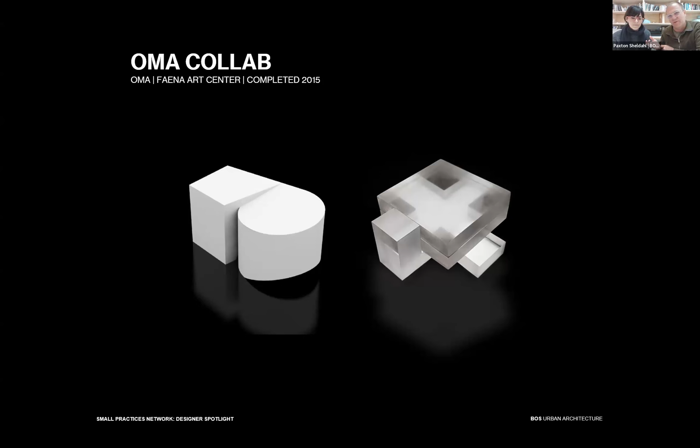We initially started the office through the continuity of, like I mentioned before, completing the Faena Forum. And then we assisted in the design, development, and construction of the Albright Knox Museum in Buffalo. I thought we'd talk a little bit about those two projects, just to run through some of the thinking behind them. I think it's kind of fun to see how they were developed.

So we thought we'd share this collaborative work, and the presentation is going to oscillate between these very large scale collaborations and very small scale local work.

This kind of box of chocolate model representing massing strategies was pretty integral to both the programmatic and the massing and formal resolution of the project. So in consideration of the context, program, site, and scale, we developed a figure ground diagram that related to many different contexts.

Also informing the massing was a consideration of the district itself and how they had all worked together across Collins Avenue, even though it was quite busy. We wanted some formal relationship between the two.

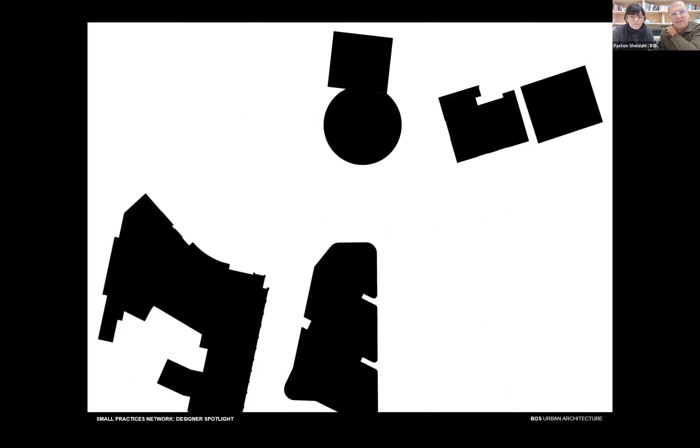So here's our final figure ground that translated into the massing. A secondary consideration, no surprise for those that know OMA's work, is the program, which was central to developing the massing.

So in the end, those two cubes in a box of chocolate model end up being a cylinder and a cube. The cube ended up being one venue, the cylinder another, but when they came together, it became a singular larger venue on the one floor where they intersected.

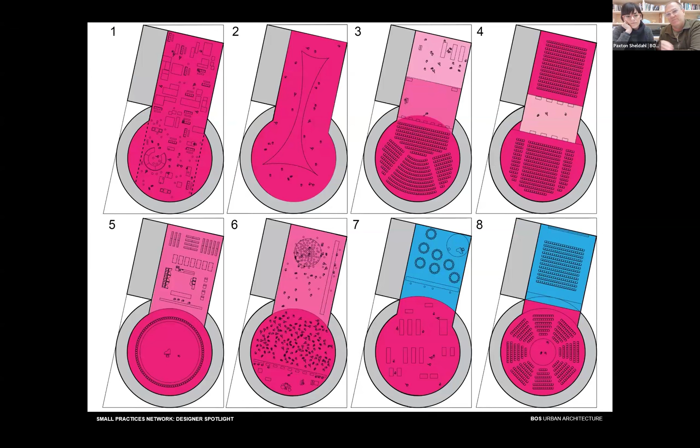This helped the pragmatic programmatic idea of how the client needed to hold simultaneous events sometimes, and singular events at other times.

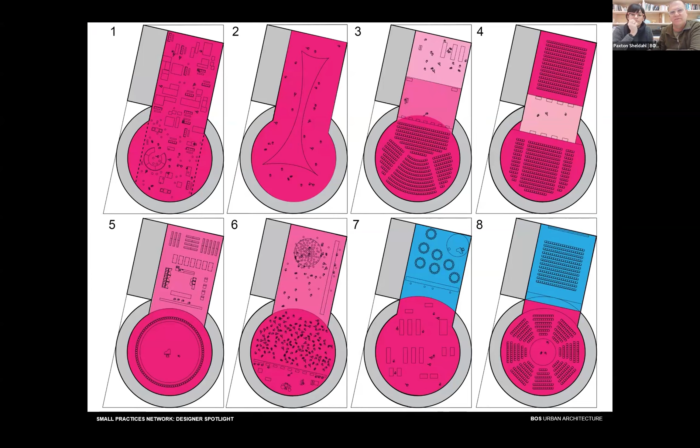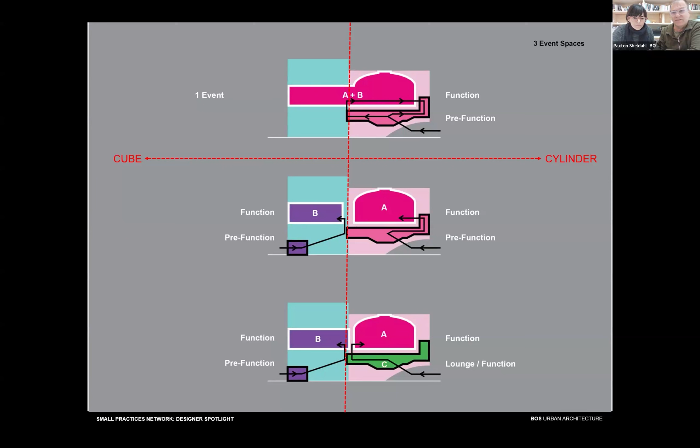These two volumes have specific plan identity that can be separated or brought together depending on event size. We did a diagram showing in section: A plus B on top is a singular event; A plus B, A and B in the middle is two different events with different pre-functions; and A, B, and C is where we actually use the pre-function for a third space. There's also a D underneath the cantilever, which I'll show later. So there's three simultaneous events.

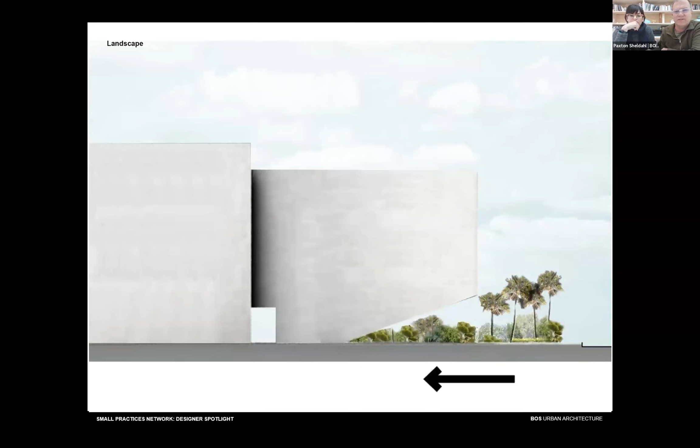But by removing that, it created our own structural issues, so now the cube itself is holding the cylinder up on one side, which basically lent itself to joining and merging the two volumes on one side versus having autonomy on the other.

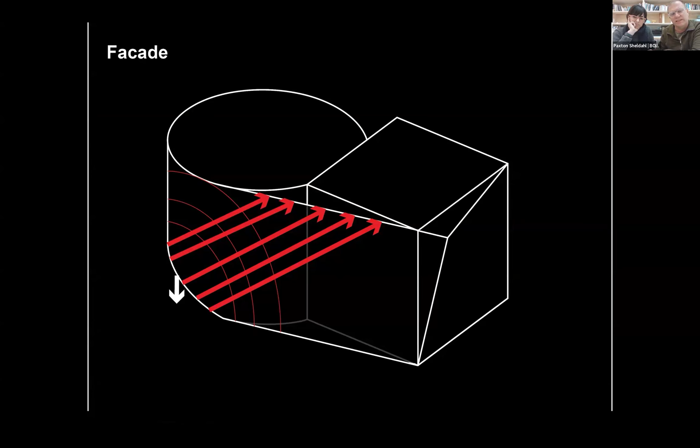So if you come from the north, it looks like a singular building. Come from the south, it looks like two buildings.

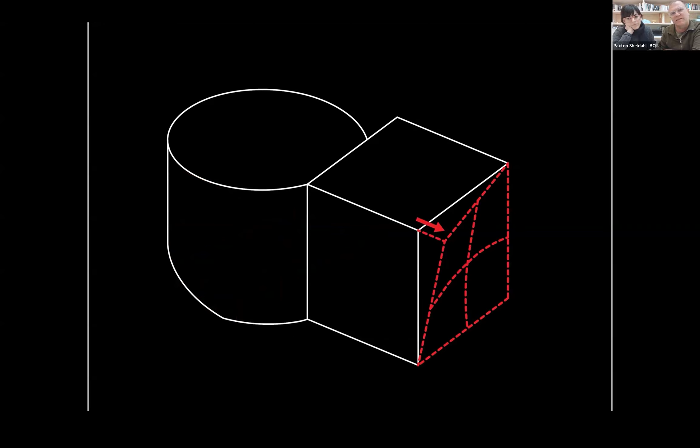In addition, even though we lost some area on the front, we gained some on the back. We were able to cantilever over the Indian Creek, set back up to 20 feet on the 4th and 5th floor, which gave us this ruled surface on the backside to gain a bit more space.

Here's our ultimate massing diagram: a singular building coming from the north and two buildings from the south. It maintains the scale of that box of chocolates, where the site almost feels like two buildings coming from one direction and one from another.

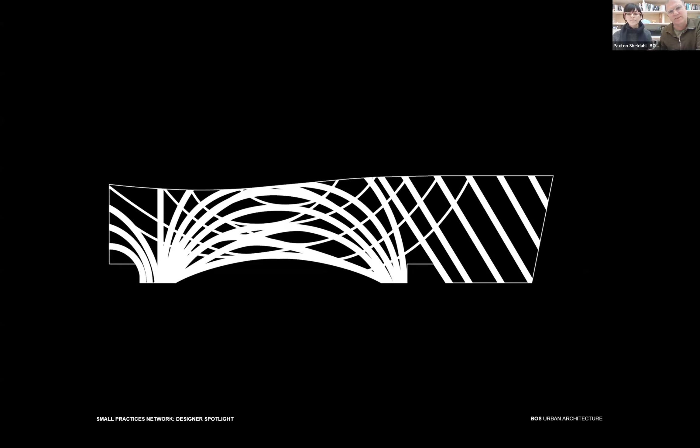This is some diagrams of how we developed the facade, an unrolled elevation of both the cylinder and the cube, with a series of catenaries and arches to support that cantilever, overlaid with essentially a grid that was an already approved NOA window system.

NOA is like the hurricane approval system in Miami Beach. If it already has an NOA, you save a lot of money because you can use an older testing strategy. So the overlay of those two basically became the facade.

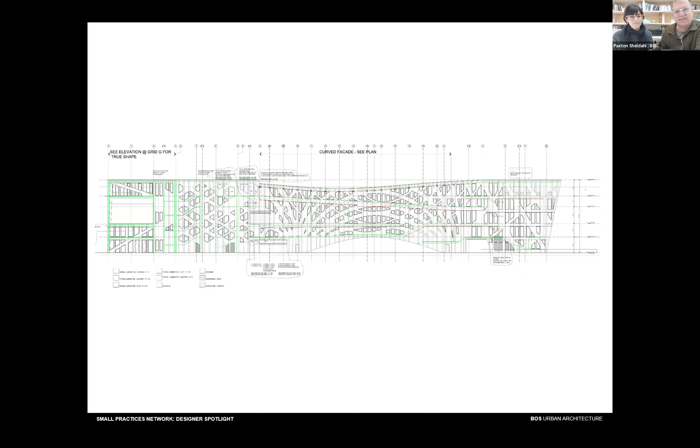Of course, it's a little more complicated than just those two things. There are floors, and everything seen here in green is essentially vertical circulation—ramping, floors. So there's a lot of coordination between inside and outside in terms of how the facade interacts with the interior. I have a few photos showing it's mainly a cast-in-place structure, and this is the ramp coming around the dome you see beyond.

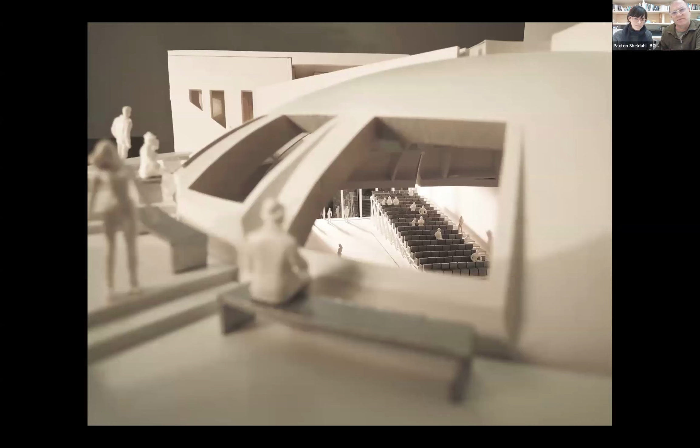A couple different slides of that, and the relationship to the facade is also integrated into that relationship. Here are some of the models of the ramp coming around the dome and looking through the dome that we used to test this idea.

And then here's the actual construction, which was not very straightforward. Originally it was supposed to be a cast in place dome with a roof terrace and a lot of other functions that had to be abandoned because of the time it took for the concrete to cure.

And the delays in constructing the rest of the building meant we had to rethink the dome into a light gauge metal structure, which was interesting because there's a company called Radius Track that does CNC bending, so you could actually make complex shapes with a high level of accuracy like you see here.

But ultimately it was a blessing in disguise, because of how much infrastructure needed to be added to the dome between the lighting rails, the strong points, the audio, the speakers - all that integration would have been very difficult in a cast in place structure. So I think in the end it looked exactly the same, still the same kind of massive look, but it's essentially a hollow freestanding structure.

Here's just some of the images of that ramp going behind the dome, looking through the dome. And I just have a few images to show the programmatic separation between the spaces.

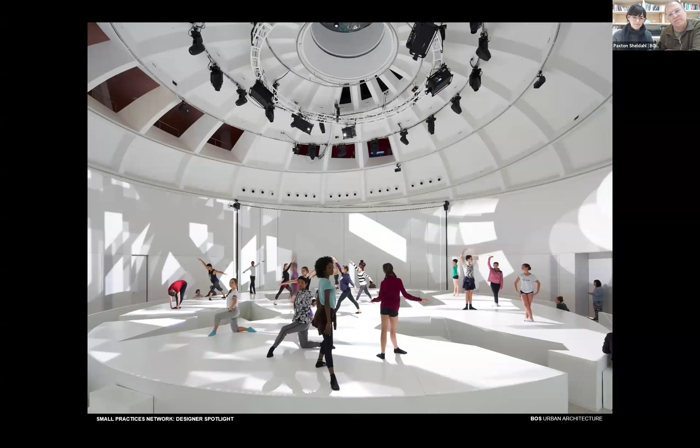So these are these large doors that could manually slide to basically close out the space. One of the first exhibits or shows was by Pam Tanowitz, a choreographer who did a dance recital inside the dome, and we designed this platform to fit into the space for that kind of performance.

And here's just an image of the opening. You can see the 3 different buildings - the 3 boxes of chocolate, the parking structure, which we're not really talking about today, and the historic renovation - those are the 2 you see in the distance, and then the final forum is in the foreground.

So this was like the beginning of our company, where I was going to Miami a lot, spending a lot of time, and we reflected on maybe some things we should have done and didn't - like developing and testing our own business strategies while we had stable fees through our collaborations. That would be some advice for those collaborating and having some stability: take advantage of that time a little more than maybe we did.

At the moment, we're still kind of trying to do it, working on it, yeah, yeah, we're working on it.

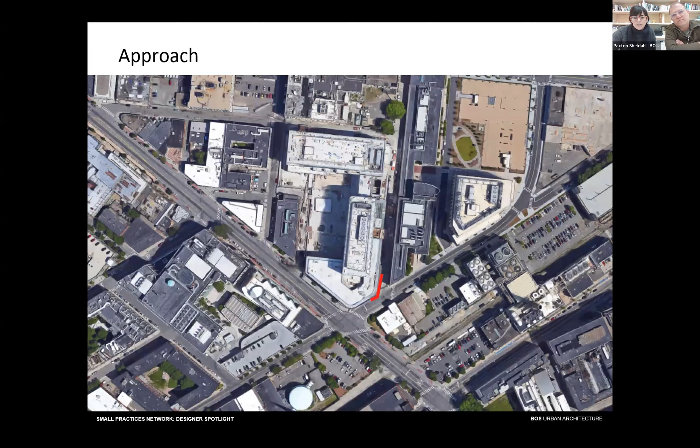To stitch the experience and address the issues of privacy and light that comes with having a 16-foot tall curving glass facade, we decided to create this system of wood fins that would unify the back and front, as well as create a cohesive language on the facade.

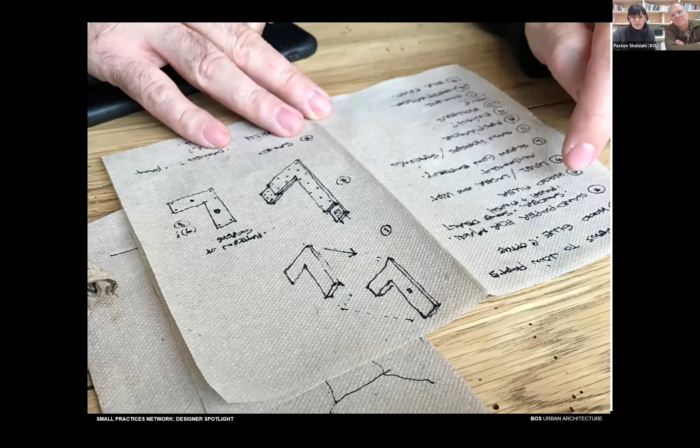As you can imagine, budgets were small and modest. During the pricing exercise, we tried to figure out ways of building these things. We went through several iterations. In the end, we proposed to the client that we were going to build it ourselves in collaboration with Bill Bancroft, which I'm sure a lot of you know. I know Penn knows Bill. He let us use his space, and it was instrumental in us being able to pull this off.

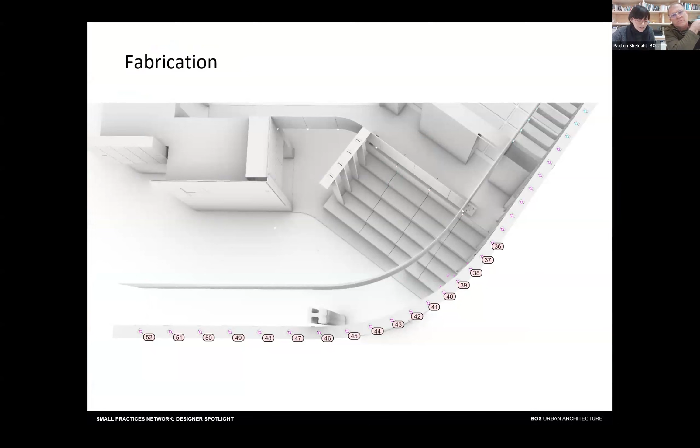There was a process that comes with building your own millwork, so we developed that along the way. We also collaborated with the GC that was building the vanilla box, and as we were developing the fabrication model and schedule, we started fabrication, the site started construction, and we started delivering.

We were milling and delivering parts day and night. This is actually before New Year's. There was a lot of labeling of parts. This is almost like building a model in studio, but big. The fins were super big, ranging from 3 feet to 16 feet.

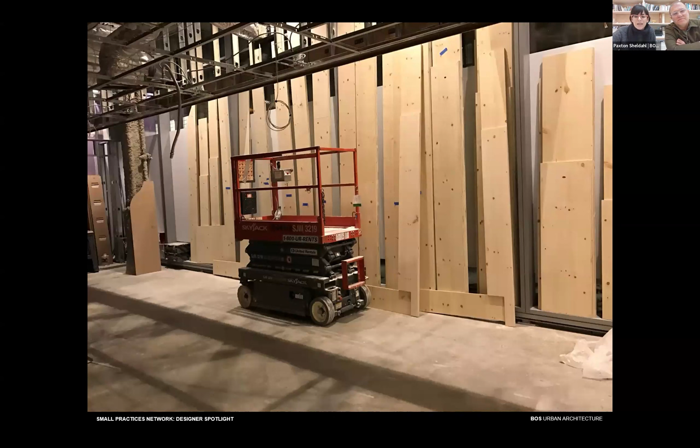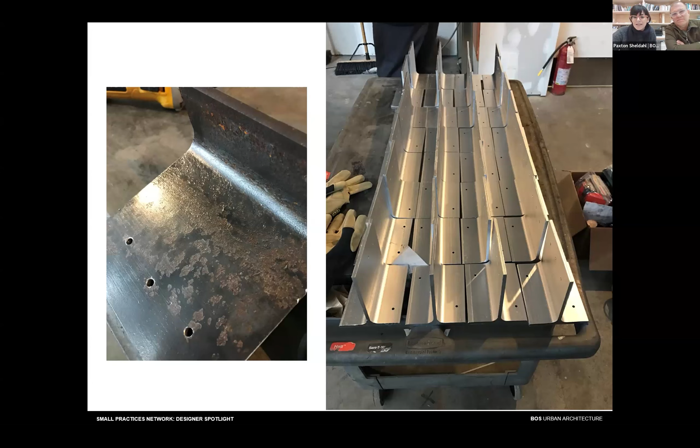We rented this little lift, and we had to coordinate it very carefully not to be in the way of the contractor. We were involved in all moments of the construction of this millwork, from creating the pieces that held the fins up—we punched the holes, then cleaned them, painted them, etc. Very dedicated. Here's some photos of that process.

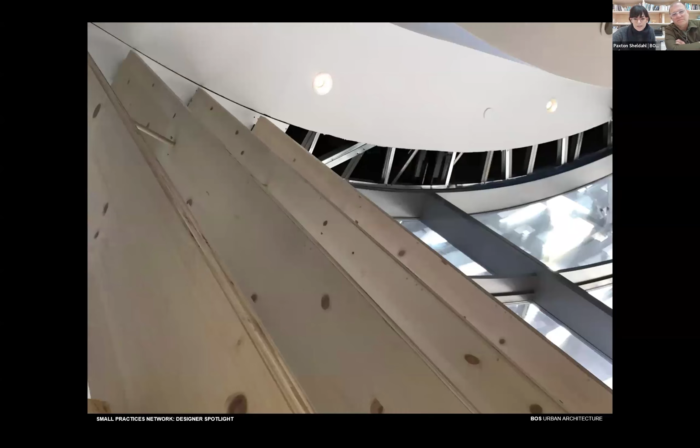We actually had to reinforce some of the structure to support the weight of the fins. That was fun. But it was actually extremely robust when it all came together.

At some point we had to intersect with the work of the contractor, and that was nerve-wracking, but it worked out. They framed the steps, and we were coming down with these fins, and it really is a perfect match. So we were very happy.

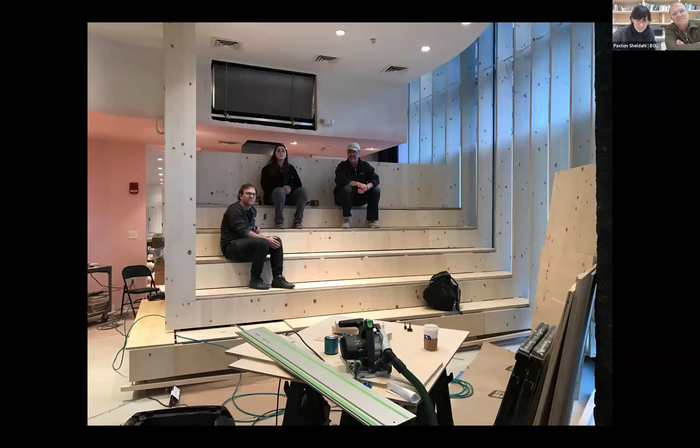Then the finished work came in, finished, sanded everything. Here's our crew, Bill there, Emma. And this is kind of like the final products and images that we were very lucky to have Bruce Lamonte photograph. So that was nice.

The studio creates a beautiful glow at night, and it feels really pleasant. Here's some final photos of the space.

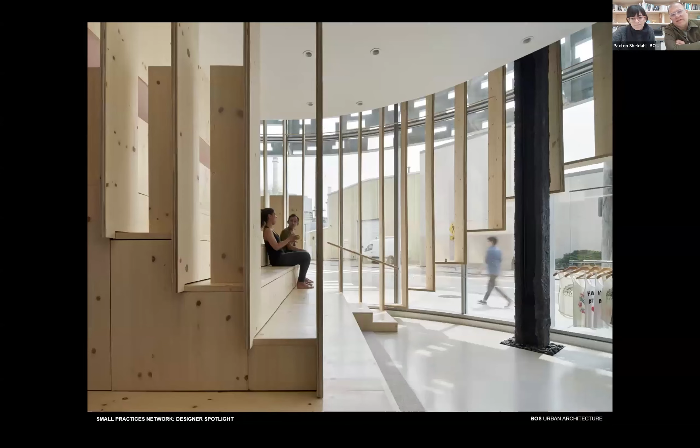Since the pandemic, it has been closed, but we have some good news: we just got called by some fitness studio that's renting it. They're in negotiation with Novartis to rent it, and they called us to help them retrofit it to whatever their needs are, but hopefully it doesn't change too much.

The lessons learned here was to get that last payment by building it into the retainer—we're just going to leave it at that. It's called the 30% rule. They're always going to try that 30% rule, stiff you for 30% if they can. No, maybe, okay, maybe not. Maybe not, but maybe yes.

So we're going to move on to another project. This is a typical office renovation project. This time we were extremely lucky to work with PRX. PRX, as you know, does podcasts, but they also have a podcast garage, which is a place for community to learn about creating podcasts.

So we helped them move into their new offices. For that, it was again a very constricted space, light on one side. So we used models to mock up the different concepts for the office space. On one hand, they needed an open office for collaboration, for workshops and things like that. On the other hand, they needed privacy—a place to make phone calls, etc. That was very challenging.

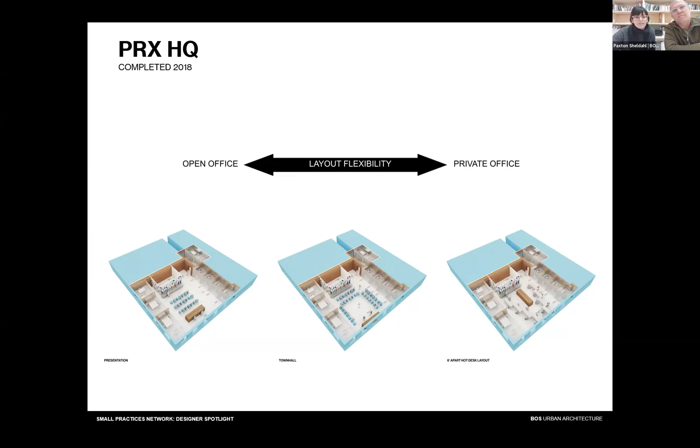In general, we basically filled in all of the edges, allowing light in—the one wall that brought the light in, we opened up, as well as we have light coming from the south. So how do we marry those two conditions where we need privacy, but at the same time we want to let light in?

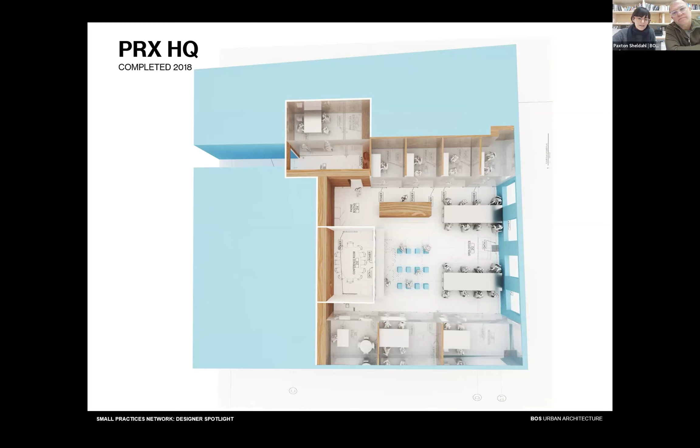So we explored that through some material experiments, and we created a very do-it-yourself wall, made with Home Depot elements and packing peanut infills to create a sort of fuzzy wall that will glow and provide some kind of warmth to the space. It had zero acoustic properties, as you can imagine, but the point was to create this static movement and the idea of privacy. We had some rooms and other elements for broader sound privacy.

This was a very fun, pretty quick project. We also had a chance to mill and build all these components of the entry, organizing the entry sequence, and we developed a logo for them.

Through the collaboration with Neon Williams, which are the people who made the Citgo sign.

Again, very low budget, working with the existing space. We couldn't move the ceiling grid and things like that, so we just used IKEA and reused refurbished furniture. We think it was a collaboration that was successful in the end, but the lesson learned was to start rethinking the do-it-yourself approach, as this isn't very sustainable over time.

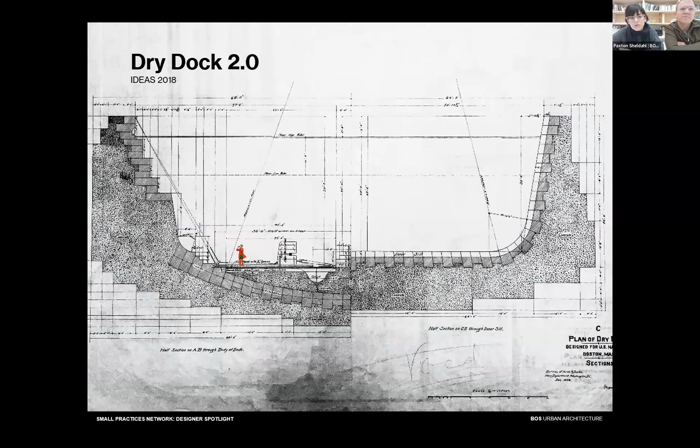So when we did this ideas competition, we decided a dry dock could be an excellent place to bring together multiple partners. We decided this would be an infrastructure for art, for play, for relaxation, where many economies and jobs can spring out through this clever relationship and partnership.

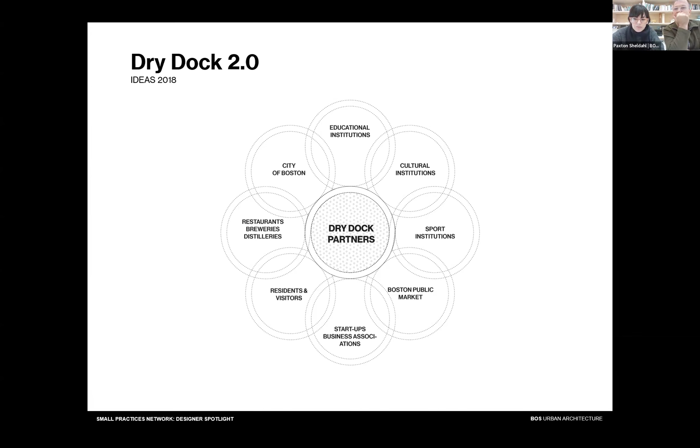Trying to go a little faster, sorry. The scale of the dry dock can be extremely intimidating and also sublime at the same time. So we started breaking apart the void into these programmable rooms as a strategy to allow specific identity to be inserted into the different segments of the dock.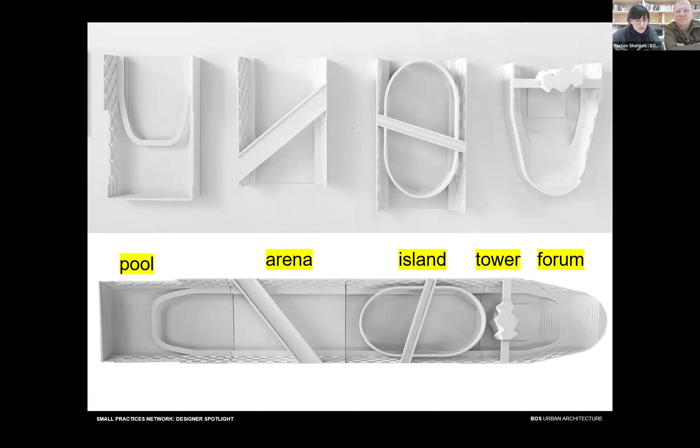So we have these five components: a forum, a tower, an island, an arena, and a pool, which were then stitched together into different experiences.

The forum will be a public outdoor theater with a seating area that connects the dry dock to First Street in Charlestown. The plaza becomes a meeting point and a gate to the dry dock.

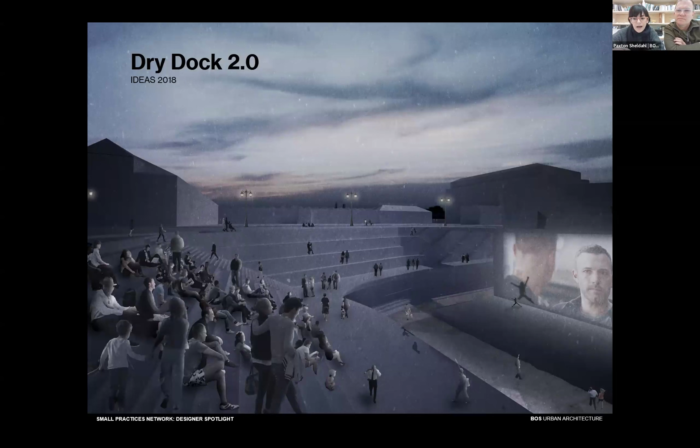The tower, right here, will hold the elevators and stairs to go down to the bottom of the dock. It's also, on one side, a climbing wall that looks towards the water.

We developed these connecting pedestrian bridges to intersect some of these components. Here we're intersecting another one of the rooms to create a shortcut, essentially trying to create multiple scales of occupation.

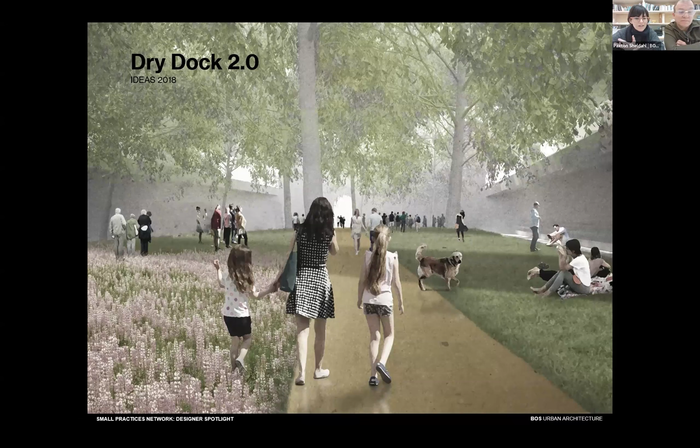This is inside what we call the island, which is a garden. Then the floor of the dry dock is this multi-purpose outdoor beach space.

The dry dock itself is naturally designed to be flooded. In its empty state, the water edge is held back from First Street, protecting the area in the case of a storm surge.

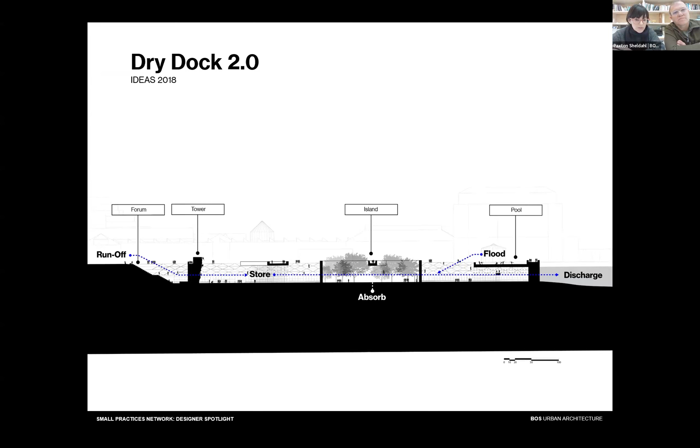But in a flooding event, the dry dock will store the water, and we can use existing pump mechanisms to discharge that water slowly. So we speculated with those ideas about what that would do, how the water overflowing could create an interesting waterfront landscape.

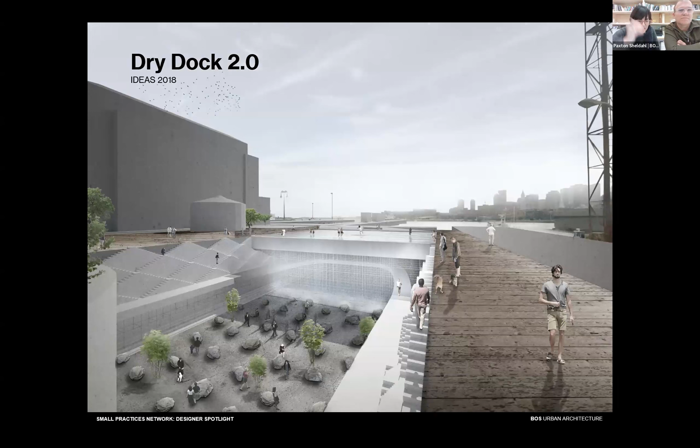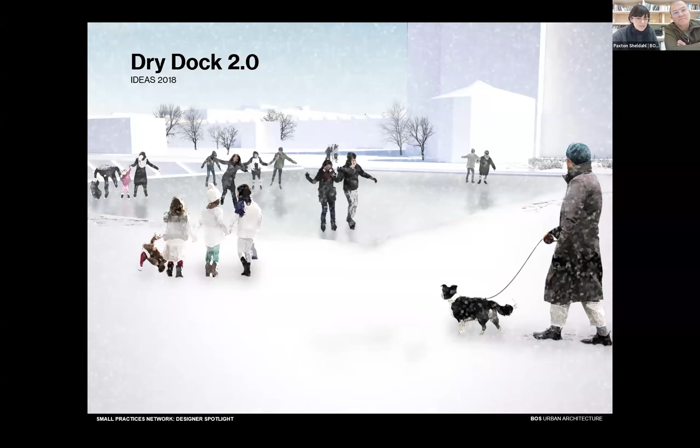We also imagined how it would play out in different seasons—here's a winter view, like a frog pond 2.0. We really loved making this for the competition, and we loved having more time to spend speculating a little bit. So that's good.

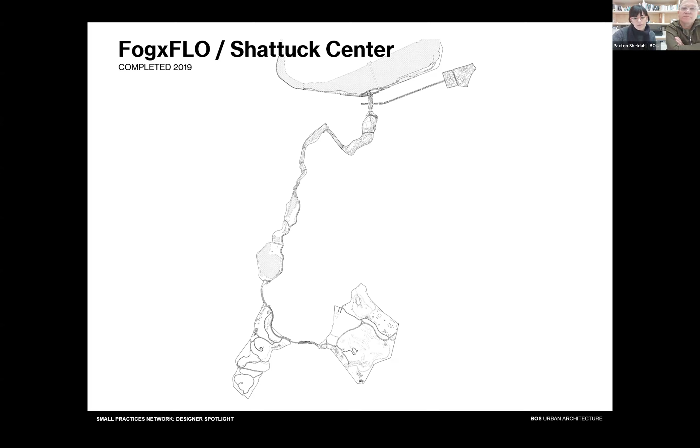So with FogxFLO, it's a collaboration with the Emerald Necklace Conservancy, which is this giant system of parks. We were acting on the Shattuck Center, which is the entry visitor center of the Emerald Necklace. In context, we were also working within the makeup of this exhibition called FogxFLO, which was the work of Fujiko Nakaya, an artist that activates landscape spaces with fog, which is incredible. If you don't know her, it's just beautiful.

So we were called in to renovate the interior of the Shattuck Center to be a temporary gallery space. This is the Shattuck—there are two buildings side by side by Richardson. One is an infrastructural pump and the other is the offices of the Emerald Necklace Conservancy right now.

So the challenge here was how can we transform an office space into a gallery space without moving a single wall, in a non-destructive way, working within the layers of a historic building and a newly renovated building by Ann Beha. So that was extremely challenging.

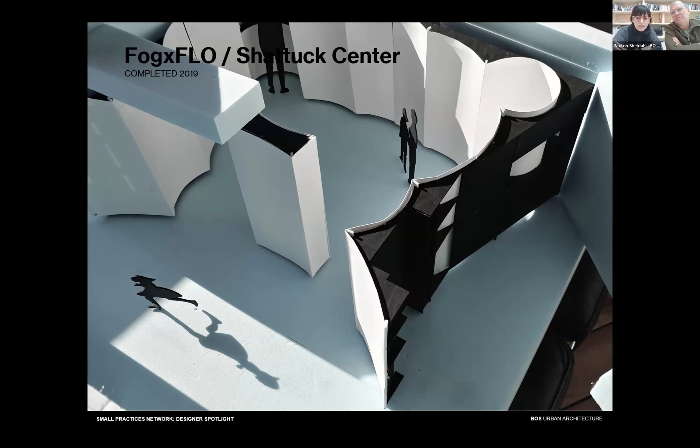Something we like to do to solve problems like this is work with models to study different ways it can be resolved. So we developed different armatures that could be self-supporting and react to the existing architecture. We came up with this idea of using concavity to simultaneously line the edges and connect the spaces inside the Shattuck Center, creating different moments and pockets that can be used for exhibition.

So here is a model. It's called a model drawing—a model that we drew a section on. It's kind of like post-production after the project was done, but it shows the two systems coexisting.

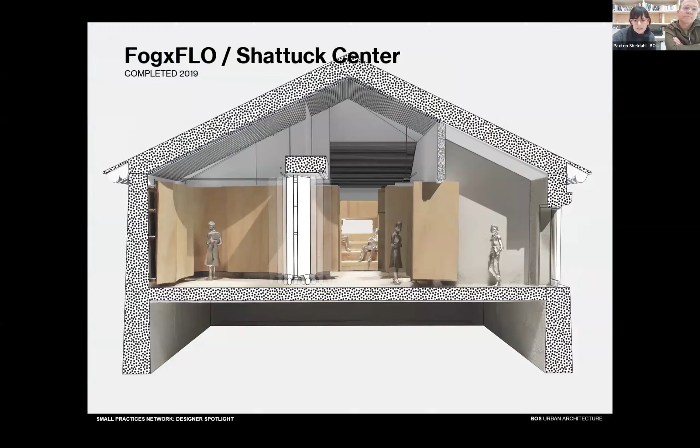So we did this mock-up, right, that allowed us to work out some of the details. And again, we're collaborating with Bill Bancroft through all of this.

Here's some close-ups of some of the corners. These concavities have very weak moments, which are the corners where the panels meet. So we decided to make that out of solid wood, and the rest out of curved core and an armature of plywood, to tackle that joint moment, which typically gets kicked and destroyed quickly in an exhibition situation. So we decided to really pay attention to this joint. Because it was lining all kinds of different spaces, it became almost like a collection of these moments where there's all these unique conditions.

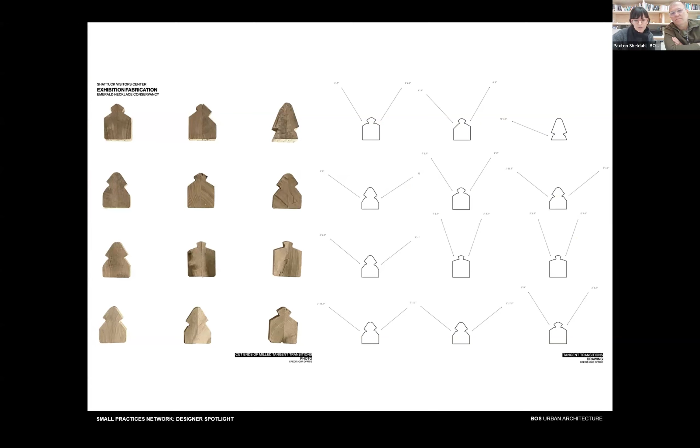Sorry, I'm trying to advance, but the computer doesn't want to. There we go. So Jen Mergel curated the content of the exhibition, and Kyle actually designed all the graphic design of the content. The mock-up became this very instrumental element to engage us all in the process of putting the exhibition together. We were able to test in real time different font sizes, test ideas, almost how the content would flow.

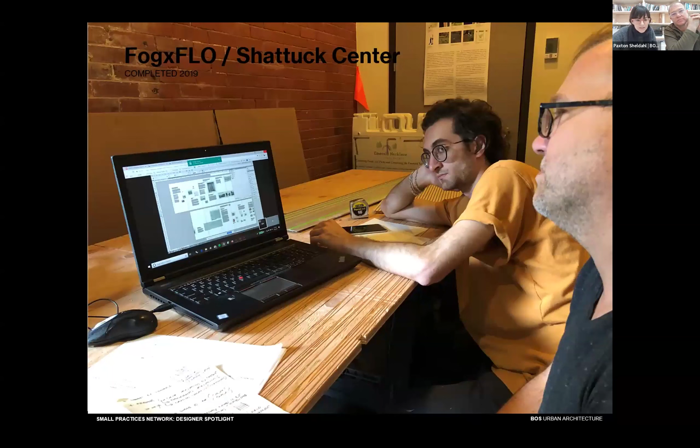There's John Levine, who was working with us at the time from Northeastern, who helped us fabricate and install the project. So again, one of those do-it-yourself projects. We were able to mill this, bring it in, install it, and work while the office of the Emerald Necklace was still operating during the day, coming in late in the afternoon to work off hours. Really love the play of light and shadow that the structure created.

Here's the armature blank without the graphics, and then here it is with Carl's work, which is beautiful. So to us, the lesson learned here is to nourish these relationships that you have with the people you have synergy with—very much something that we would love to repeat.

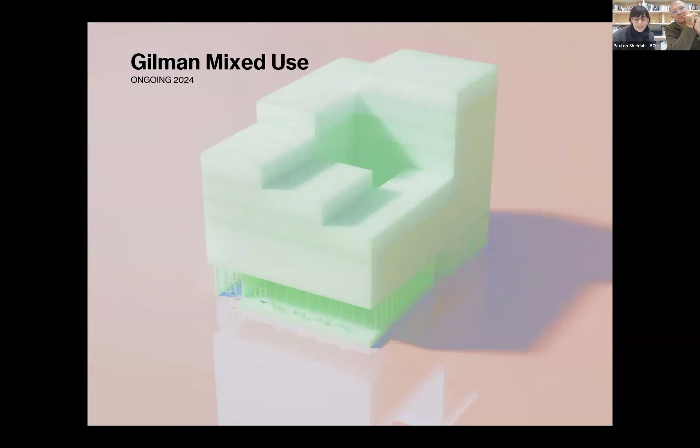Along those lines, we were working with Roundtable Studios, doing collaborative work to pursue this development of housing and mixed-use development in Gilman Square. We're working through options for a developer for a really long time—almost a couple of years of work. As Somerville was redoing their zoning, we were adapting to it and proposing ideas. We're still in the process of getting this project to fruition.

So you can kind of see we're evening out, right? The local work starts to even out with the collaborative work from OMA. We ended up doing a lot of this during the pandemic. It was also a high production moment where we did a lot of residential renovations, as everyone wanted a new office space in their house, etc. So we got work from Merge Architects—actually, I think Kyle, you punted this to us.

This is probably one of the smallest projects that we have ever done, and even though it's small, it was not easy. Because of it being small, it wasn't easy to build.

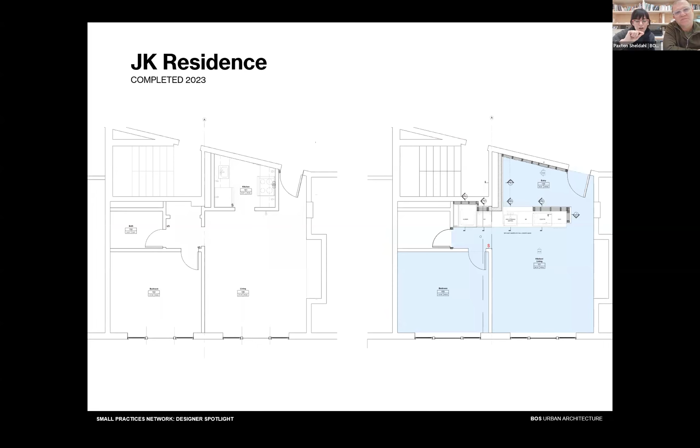It's a 400 square foot apartment where we reconfigured the kitchen that was initially in a little closet. Our client wanted to feel a little more lofty, so we reconfigured to this linear kitchen and created a little pocket of space along the entry for him to put his piano. So this is the result of that.

Joseph was the kindest of clients, and worked with us through all the difficulties at that time with delays of material, pricing spikes, et cetera. So small projects are sometimes more time consuming than big projects.

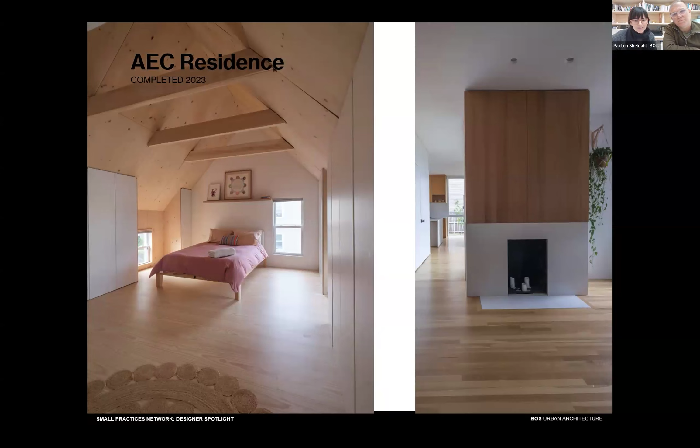We also did a renovation for a couple in Malden, where they bought this beautiful big house, but it was a mess. We were able to reconfigure it to feel a little more open. This is something we typically do. Here are photos of the kitchen and upstairs bedroom and some of the blocks that organize the house.

Lesson learned: find the time and energy to document the projects so you're able to tell the story, because the flip side of working through the pandemic is that we just now came back to photograph them and document them. So it's a lot of work we did that just got lost almost in some sort of limbo through those years.

In this tiny, long, skinny storefront space, we decided to play a little with false perspective. So we inclined the ceiling, sloping it, to create more intimacy at the back and almost dissolve the tightness of the scale. We created this oval oculus that provides lighting and centers you in the room.

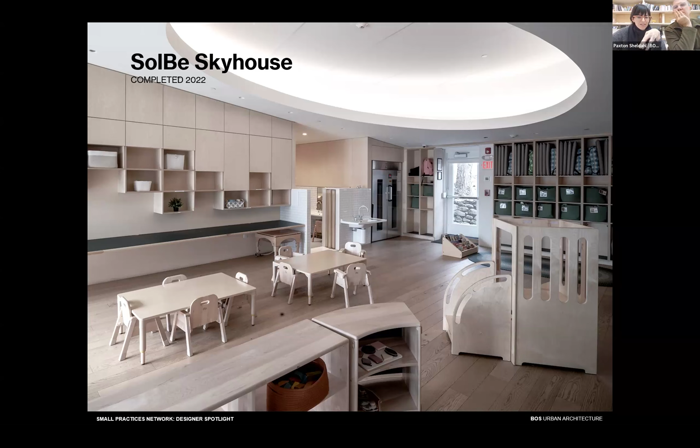The kids use it to gather under, and the light changes at story time. It's used in the wintertime, like when it's dark at 3 p.m., it really brings warmth and a sense of place to this tiny room.

Lessons learned on this one: don't blur the scope boundaries. We got a little bit into that, coming out of a moment of doing a lot ourselves, and then entering again into a more formal world of construction. We tend to blur the boundaries and order things we shouldn't be ordering, and take on scope that really belongs to the GC. So we learned to keep it separate.

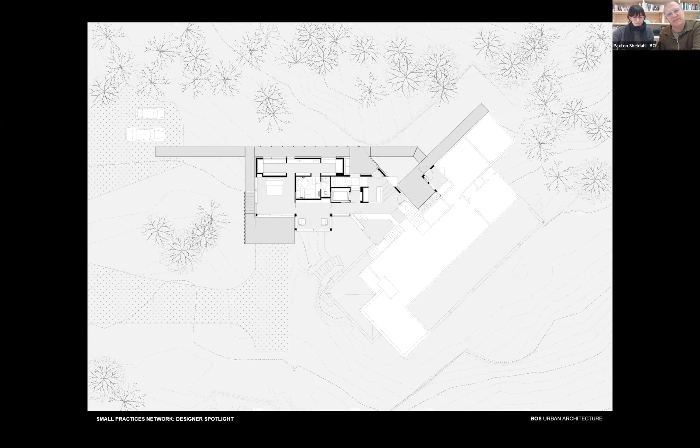It's an interesting project to stitch together this old gambrel structure into basically what is essentially a master suite - a master bedroom with some changing, a master bathroom, and upstairs on the second floor is a loft area, like a reading loft, then an office for them. They still do some telemedical work up at Lake Sunapee, so they needed an office with some privacy on the second floor.

Here are some of the drawings that we did, the intermediate between that gambrel roof structure and this structure.

Here's some of the images. The screen is providing some privacy as you're walking up this ramp, because this is where Amazon comes up - all your deliveries come up this ramp to the front door. So there's some privacy element that we created here. There's also a direct stair if they want to bypass the ramp and the sequence to get out, they could go straight down the stair.

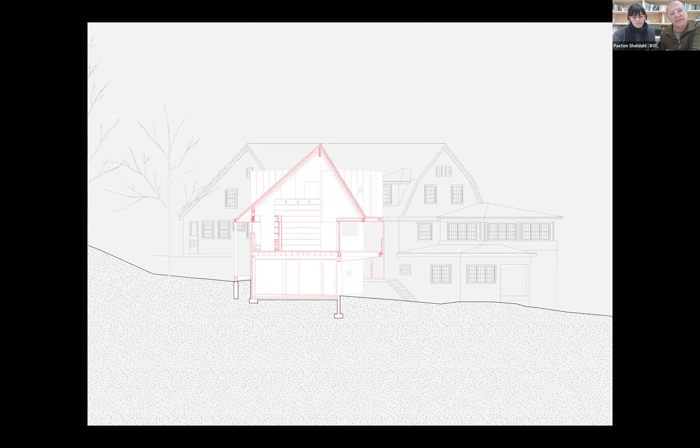Here's a primary section through the living space. There's a large overhang, the porch that gives you the view of Lake Sunapee, which is quite nice. That's one of the other reasons they wanted to do that - their existing bedroom doesn't have a great view. So they're benefiting from the location and the view that's gained through the addition. And here's an image of that.

In the summer, the view - there are a bunch of trees within 50 feet of the waterfront that they can't touch, that's a state law. But in the winter, it's much more clear. In the summer, it's much more lush, but they could still see the water through the trees.

This is the overall space. They were very interested in maintaining some of the qualities of the existing house, but the existing house was essentially all wood. It's been retrofitted to have insulation now, but initially it was just basically a wood clad house inside and outside, and they wanted to maintain some of the same qualities. So this is also basically a Douglas fir clad interior - both the roof system and wall systems were all clad in the same Douglas fir.

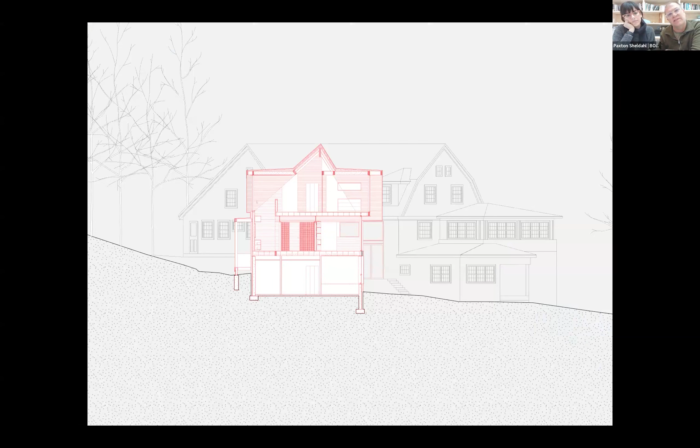Here's a section through the second floor. This is the office on the upper right. As you arrive, to the right you have a view of the woods and the hill going up, and to the left you have an even better view of the water from his office. And then it's all overlooking that master bedroom in terms of interconnecting where his office is, where they work, and where they're sleeping.

Here's an elevation on the lakeside, and here's the view of that. Now there are other spaces in here, like in this main central space. The very top is the office space. Below that is a reading room where they could sit in the sun. And even below that is a greenhouse where they do a lot of their own gardening - they have a lot of seedlings and wanted this greenhouse to be able to start all their seeds for growing different types of plants.

The lesson learned on this one was time and materials, never again, even in a pandemic. There was a lot of frustration on the client, architect, and builder side because of the contractual relationship being time and material—no one was controlling the labor market at the time, the material market was unsure, and very few contractors were willing to take on fixed-price work within a year or two. So it was a difficult relationship to get into and go through, because the cost was kind of out of control and non-controllable due to the contractual relationship. So even if it means waiting a couple of years, I may recommend any client wait if that's how the market is leaning.

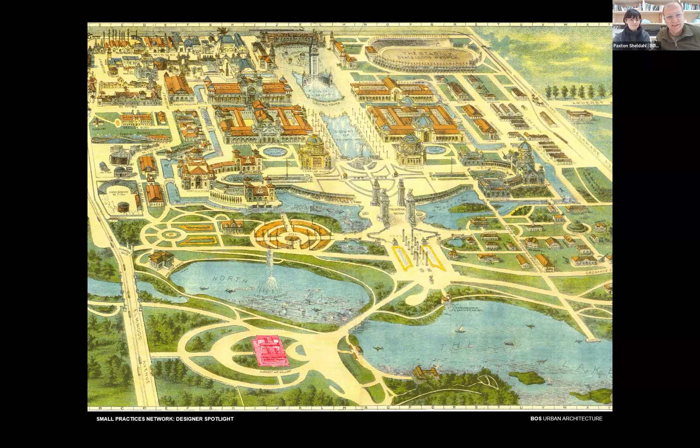For those from Buffalo or who know this area, E.B. Green positioned and planned the Albright Knox as part of the Pan American Exposition in 1901—that's the little red dot on the lower left. As a museum in a park, it's actually in a park designed by Olmsted, so it's literally a museum in a park as the original concept. You can even see the roads that go around the museum, showing continuity between the green space and the museum itself. Here's a site view, an aerial view of that.

Originally there was a central axis in the middle of the sculpture terrace, maintained until Gordon Bunshaft came in the 1960s. Bunshaft, a Pritzker winner, is probably Buffalo's most famous architect—I love his work. He was commissioned to create an auditorium and courtyard addition you see in this plan, and he did the unthinkable from a preservation standpoint: if I tried this scheme today, they would not let me take away the main central classical axis and put in a parking lot, which is what he did. He also reoriented the entrance sequence to no longer be on that axis but off to the side with the courtyard, marked here as entry, all to facilitate parking.

It's a beautiful addition—you've been to this room when all the curtains are open, and it's spectacular to be in. It was also an interesting courtyard, similar to the Beinecke Library in terms of the volume and courtyard relationship. But it honestly didn't work for the museum. We got a lot of talking-to by Janne Sirén, the museum director, about the relationship between these corridors, which were meant to display art, and the number of art incidents—every time someone bumps into art, the museum documents it. It was something like 600% greater in these two corridors than the rest of the museum, so it wasn't functional as art.

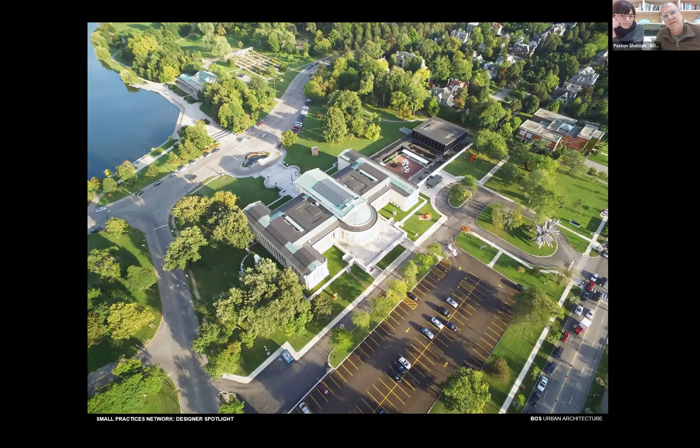The museum initially told us they wanted us to build over the top of this courtyard to integrate the 1962 Bunshaft addition and the 1905 E.B. Green addition with a new lobby that celebrates both facades in the space in between, which you'll see in a second. One interesting thing is Bunshaft also didn't reconnect to the park—he provided an entrance but no exit, so he kind of turned his back on Olmsted's park. He's a great architect, but in retrospect you wonder why. So OMA's first idea was to essentially bring the park through the museum again, restating that idea of a museum in a park by letting Olmsted's park come through.

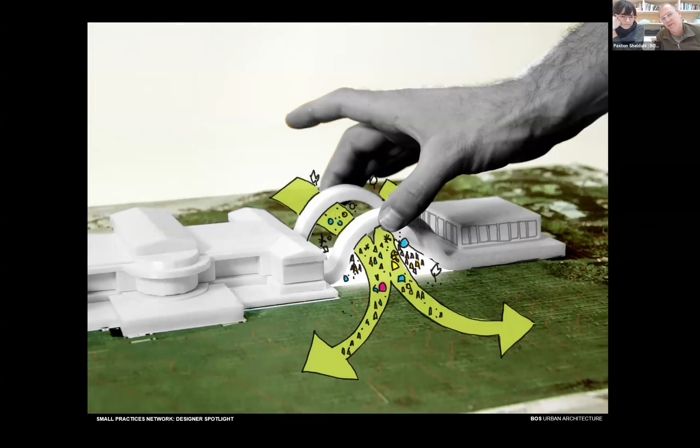And there are a number of collages we do of these classic Central Park bridges. That's the idea of a bridge in a building, kind of bringing the park through that void space.

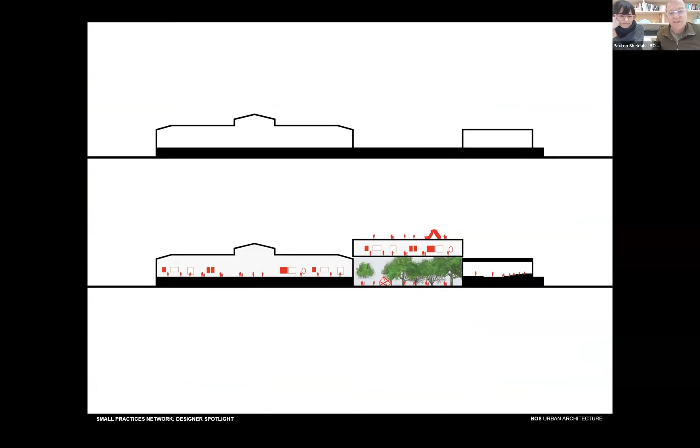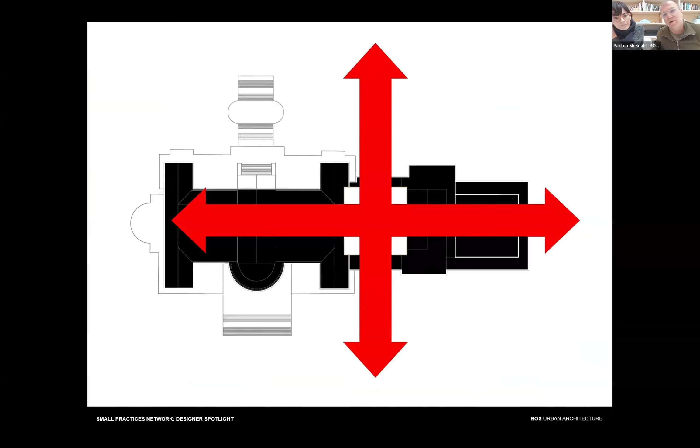Here are some early sketches, very sophomoric sketches. The museum's much bigger than that, but let's pretend the museum could actually sit there in one story. The idea was clear, right? You create this axial relationship between park and art. One direction is art, the other direction is park.

It could be a very beautiful idea. On the right, you can see the 1962 addition by Bunshaft. On the left, you can see these classical columns. So this lobby is kind of the intermediary between these two different eras.

And then the third era is above. You can't really see the addition above, but that would be the third iteration of this museum, kind of in this dialogue.

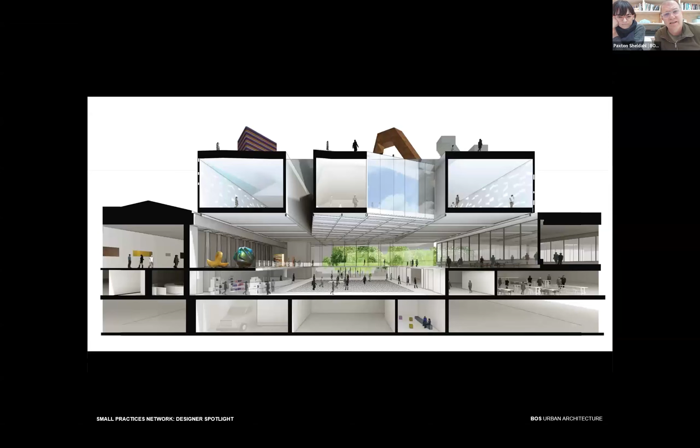So we went through a lot of studies trying to figure out how to make that work, did all these fancy renderings, and then we just got smashed by the preservationists. Anyone following this project probably knows this happened. We were pretty far along in this idea, and we liked it from an environmental point of view.

It's actually much cheaper to build in a more compact envelope. We think it was a better footprint for the park because we are also burying a parking structure. So then we could bring the park back all the way around and restore the axis of the classical building.

But man, they basically shut the whole project down through the criticism. And maybe some of that criticism was fair—I'm not saying they're wrong, I'm just saying this happened.

And I like some of these comments about Shohei, like he's a rank amateur. He finds it kind of funny, but it did make us rethink the whole project, mid schematic design I guess.

So we went through a number of options, like everybody would, trying to figure out where this goes. And ultimately we ended up putting the building as far away as we could from the existing structure, while still on the property of the Albright Knox. So this ended up being the corner of Elmwood and Iroquois Drive.

There's a number of reasons for that. One is loading still was a challenge in the scheme we were proposing, but by pulling it all the way over next to Iroquois Drive, we could solve the loading issue a little bit better, because we did end up burying the parking structure.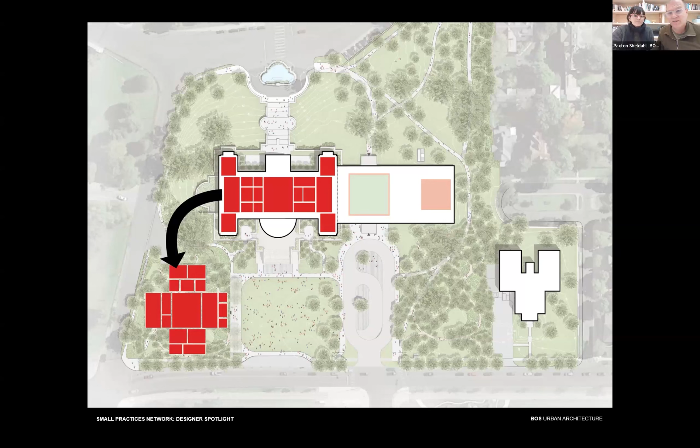So some of the ideas around the actual building itself was that art was in this kind of cruciform form. All the galleries we proposed were actually very similar to the classical gallery proportions in terms of height, width, and length. The Albright Knox really liked the proportion of those galleries.

The curators wanted to maintain those proportions, so we didn't do any super oversized galleries, except on the third floor, where we created a more contemporary art gallery. The rest of them are pretty classical gallery proportion sizes.

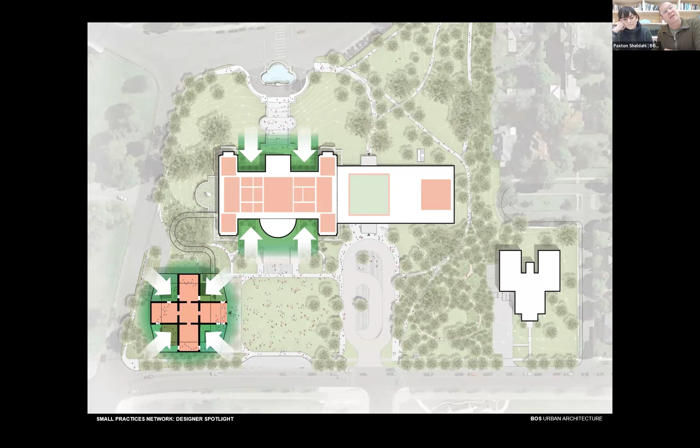This left the corners of the museum open, so the corners became kind of services: one is administration, one is circulation, one is a black box—not a black box theater, a black box gallery—and then one is loading. So all four corners just became functions.

So art in one direction now had its own relationship. It's not necessarily related to the classical structure or the 1962 structure anymore, but it has its own relationships now that it's trying to find.

And then the other thing was the bridge, which you'll see in the photographs. The bridge basically became the link—a link of art path, which kind of meanders around the art.

You kind of see a little umbilical cord linking the new addition and the 1905 building. That umbilical cord was both art path and circulation, so you can link the two buildings as well.

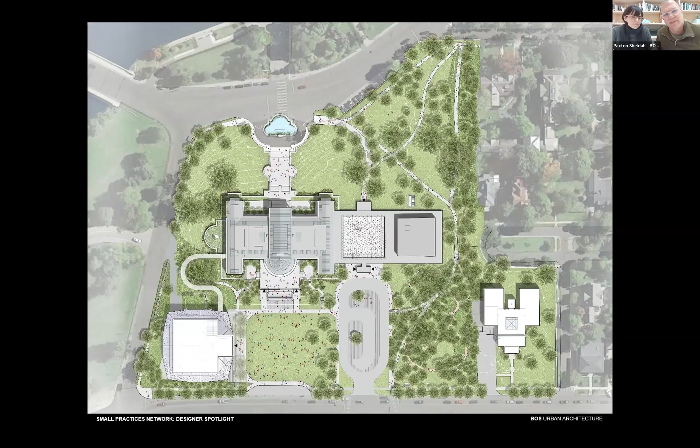So it's a little bit less than 1 in 20 slope linking between the two buildings, to be able to move art from a loading dock through that path and into the classical building. Just an overall view of some of the models we're doing.

So the actual program became one thing, and the space in between became something else. Building in Buffalo, there's a climatic issue of how much exterior space you could have. We spent a lot of time thinking about Louisiana and Denmark, and these ideas of different spatial experiences, the intensity of viewing art, and then the need for some kind of break or reprieve from that intensity, which has to do with looking out to the Olmsted Park.

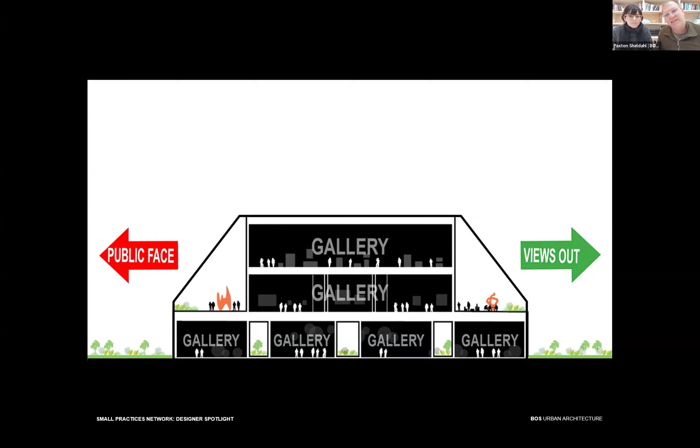So this idea of inside and outside became essentially a promenade, a 360-degree promenade around the art spaces, which are the gallery spaces you see in the middle. There's a lot of interplay between inside, the atrium, and outside of the gallery. So again, nature and art. The idea is that nature surrounds the art, but it's also protected from the winter, so you could use it year round.

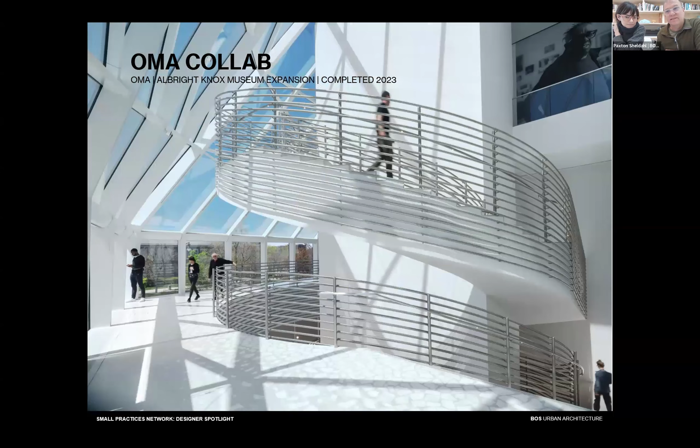Here's the link, the start of that bridge. This is where the cafe is, occupying a zone in between gallery and nature.

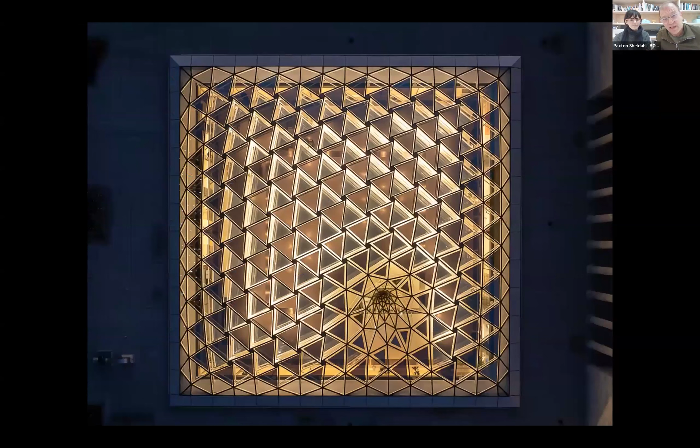In the end, the museum got their way. The preservationists mostly objected to covering the void of Bunshaft. They said the void is just as important as the volume, which I'd probably agree with in terms of the composition of that space. But Janne Sirén was determined to close in that void, mainly because of all the issues they've had trying to display art there. They wanted to free up that void by basically removing the interior facade.

They were able to expand those corridors, so they no longer have the issue of displaying art in those corridors. So they hired Olafur Eliasson to basically cover that courtyard. I wouldn't say they got around it, let's say they have the right as an organization to curate their own art.

SHPO and state historic preservation boards actually don't ever tell an art museum how they have to curate their art. So if they hire an artist to cover the courtyard, it's no longer in their purview. So they got around covering the void by hiring another artist to basically cover the void. They're able to essentially get what they want, and they also have this very beautiful space as well.

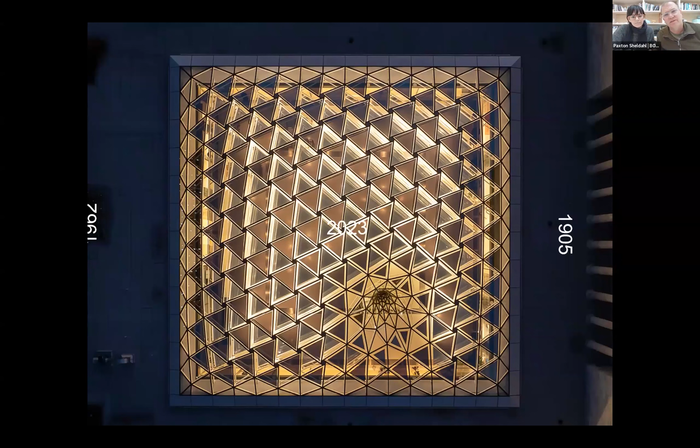And I do have a view. So this is the 1905 on the right, 1962 is the facade on the left from Bunshaft.

And in 2023, Olafur did this very beautiful art piece to cover that courtyard. A couple of last thoughts: maybe we need to rethink preservation to adopt a broader vision of what it means to preserve architecture, especially contemporary architecture. That's a bigger discussion than we have time for today. But I do like working with artists and architecture. We got to work with Olafur in terms of collaborating on making that whole space work, and the integration, the detailing of architecture and art was a lot of fun.

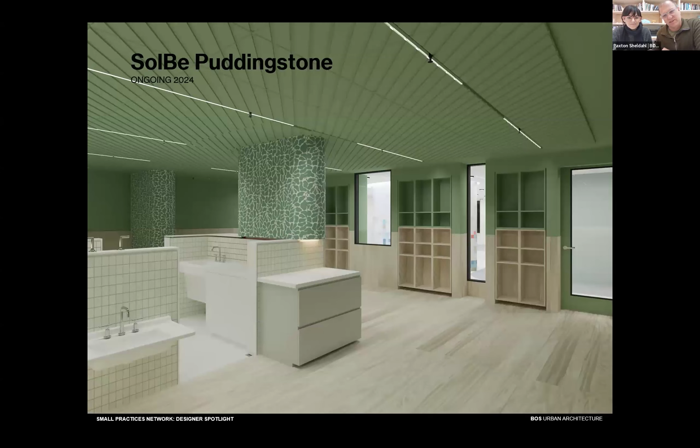But right now we're working on a lot of local projects. We're doing another project for Puddingstone, for SolBe - you saw the one storefront we did. Now we're doing a 5,000 square foot version of their childhood education centers, and there's a lot of principles that we learned in that small storefront that are now deployed here.

And this was like a few weeks ago. I think it's going to open up probably end of this year. So this is under construction. Sorry for the bad construction lighting, but these are some of the spaces we designed and how they're coming through right now under construction.

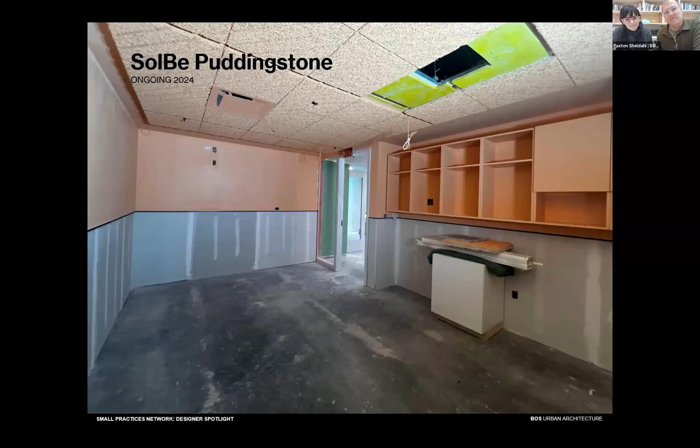We did a house that's in Arlington that's almost done, just missing some railing and some doors, kind of in the progress of being completed. But this is also a pandemic addition that took way too long. We have a house that's in design right now up in New Hampshire, that's basically for a family to be able to retreat to.

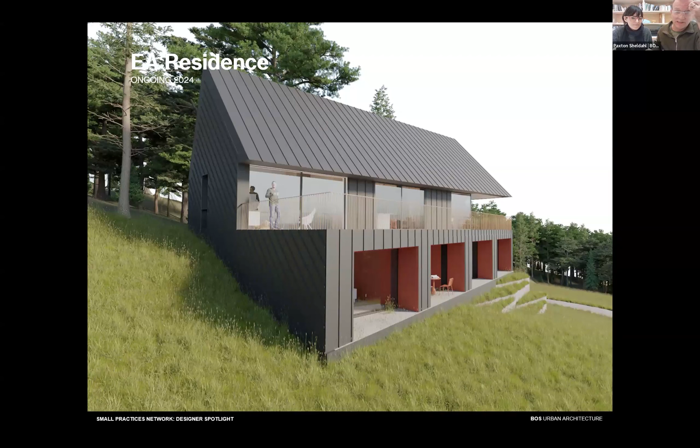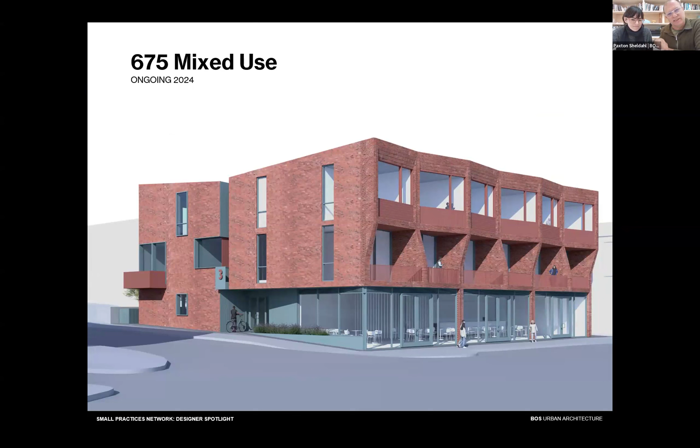And then lastly, we just got approved a project for Somerville Ave for housing, so it's our first kind of multifamily housing as our own company. We've done it obviously for other companies we work for, but we got a 14-unit building on Somerville Ave, near Porter, that just went through urban design approval that we're very excited to keep working on and develop. But that's still ongoing, we'll see how that ends up.

But that's it. We did that in 54 minutes and 49 seconds. Thank you all.

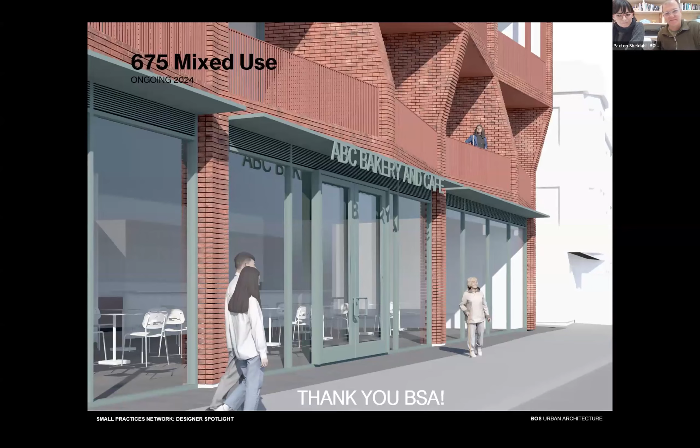Great to see all the exciting work, love the art and architecture piece. How do you envision incorporating art into architecture through your practice, with local greater Boston or New England artists instead of through OMA?

That's a tough question. I hope you're doing well, Liz - she's a former student of ours. I would like to. We did Fujiko Nakaya, we were kind of adjacent to Fujiko, and that was also a very fulfilling collaboration, even though we didn't interface with her too much like we did with Olafur and Miriam. I think those opportunities are challenging when you're a small practice. I don't think many people are looking to a small practice to solve some of those issues - they're usually much larger budgets, unfortunately. I wish we could. If someone has an artist network they want to reach out to us with, they should do that.

It's definitely kind of what we would like to do more of. Definitely like with the Emerald Necklace, that was our first taste of it, and thinking more in the community scale, that could be great.